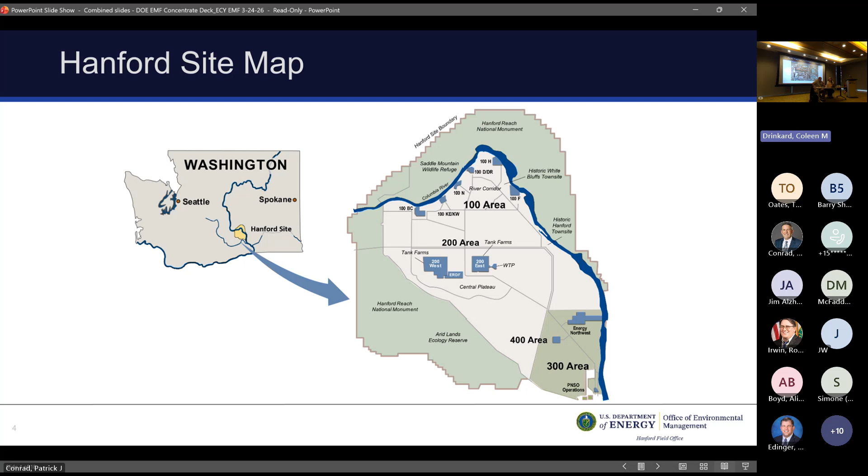Is it not switching over? Did it switch for you guys? Yeah. Oh, there it is. I'm sorry. My computer is slow. I'm on my phone, so my wireless is a little slow, and I don't want to make you guys feel weird by me looking behind me all the time. But I do want to make sure that the slide is up before I start to talk to it. So apologies for that. It's just a logistics thing.

I will try to be more patient. I also will acknowledge, I know I do talk fast, so later on when we get to the questions, I promise I'll answer your questions, but I do tend to talk kind of fast. It's just one of my little peculiarities.

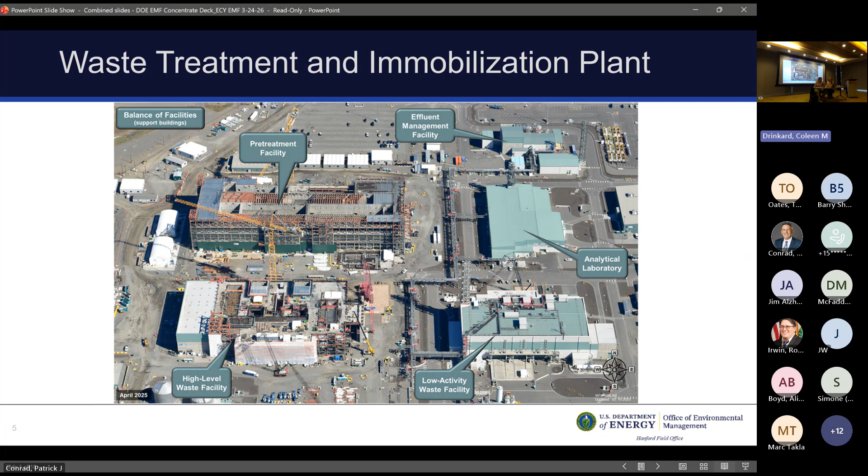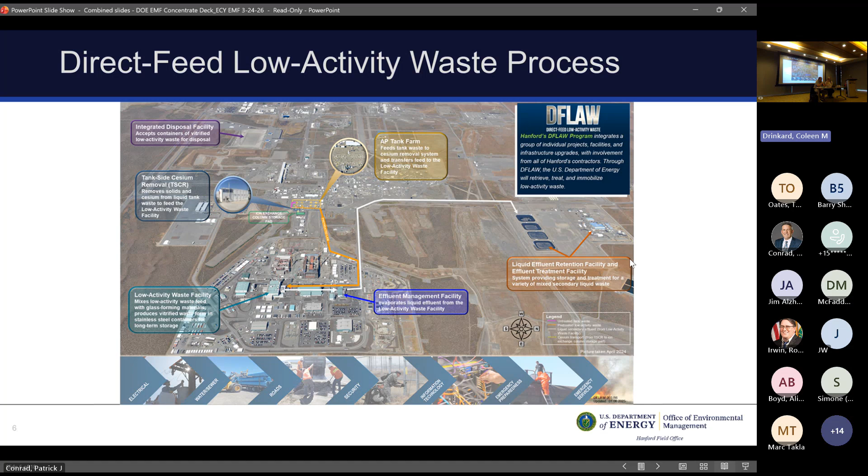And then our mission support contractor, HMIS, provides all of the infrastructure that's along the bottom. So it's just to show the integrated effort that goes on as we're making glass and performing this part of the tank waste mission. But it also shows how the materials are transferred from tank farms to LAW, from LAW for secondary waste, and then the actual containers that go to the integrated disposal facility. So just trying to give you that context of how the facility operates. So we'll go to the next slide.

Now we're going to talk about the overview of what we're proposing here. The effluent management facility is where that white line, after it leaves the low activity waste facility, goes. It has an evaporator in it. That's where we take those liquids, boil off the water, and send that condensate to the liquid effluent retention facility. And then the stuff that stays at the bottom of the evaporator, we call that the bottoms or the concentrate. That's the material that, and we will still have this function, by the way.

Our original design said we would typically feed that back into the melter, instead of feeding more AP-106 waste, more tank farm pre-treated LAW. I apologize, I know that's just inside baseball, as it were. But that material, we would feed that back into the melter. What we found is that material, the radiological contents are quite a bit lower than we expected, and it's much more benign than we expected. We will still be able to feed it to the melter if we have materials that come through that have some anomaly, and we will continue to sample it that way.

But we're proposing an alternative approach: we take that material, sample it, put it in a tanker truck and send it down for grouting, and then outside the state of Washington for disposal. Instead of sending that material into the melter, it allows us to increase the amount of the pre-treated tank waste we get from tank farms. So the intent is accelerating our mission, because we'll get about a 10% to 20% increase in the feed to LAW coming from tank farms, because this material would then go to grout. And if we have a sample problem or it's elevated, then we can send it into the melter just like we do now.

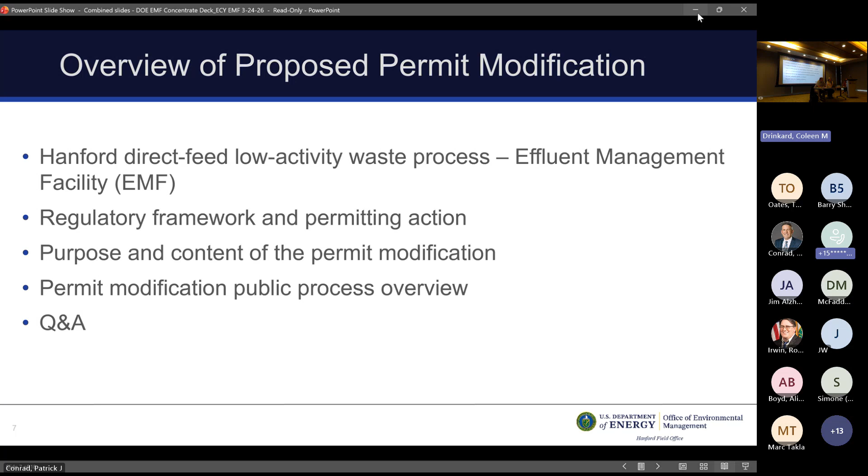Okay, so the first bullet we've already talked a little bit about, which is the multiple facilities that are involved. Yeah, thanks, Colleen, for asking that. The secondary waste is covered in the second bullet. And as we talked about, it goes to an evaporator, the steam that's then turned to condensate is sent down to our liquid effluent retention facility and the effluent treatment facility. And then the heavier elements that are at the bottom of the evaporator are then put in a separate vessel that then we can either feed back to the melter, or we can put it in a truck and then send it out to be grouted and then disposed of outside of the state of Washington.

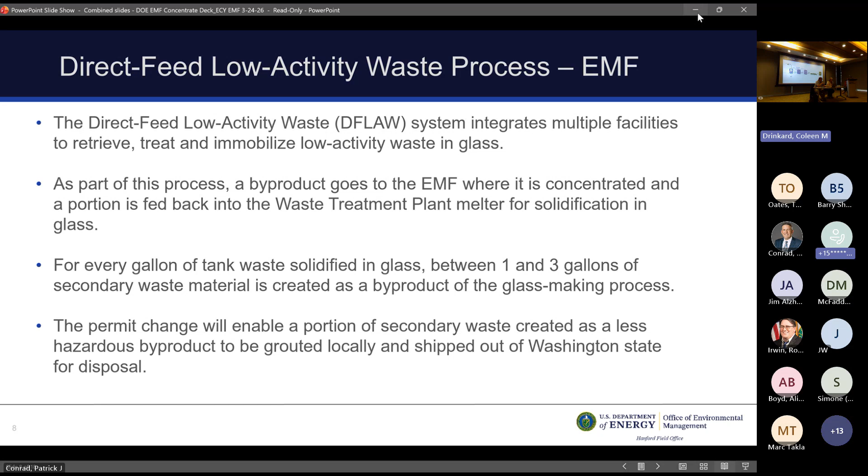So the last bullet is that EMF bottoms or concentrate. So I'm using both terms because they've been used interchangeably from a layperson standpoint. So if we can go to the next slide, I think that'll show us our graphic. Oh, I'm sorry, I need to talk about benefits.

And we talked a little bit about this, the reason we do want to free up double shell tank space is because right now we're 97% full of our double shell tanks. We have been making glass, so we just finished a 2-week run on the melter, and so we are making glass and filling containers, and that's great.

But the faster we do that, the more double shell tank space we make, we allow ourselves the opportunity to accelerate our retrievals, which today we're doing 2 retrievals, and I know that's not part of today, but that's why we want to maximize that double shell tank space so that we can continue our single shell tank retrievals and continue our mission. And at the end of the day, finish our mission. So that is the single biggest benefit.

It does not take away the ability to still feed the melter if, like I said earlier, sample results or something changes, we may get to the point where we're feeding the melter and the secondary constituents change, and that could lead us to feeding it back to the melter, and that's fine. But for those opportunities when we do, it'll be at least a 10% increase in our throughput from tank farms, could be as high as 20%.

And then just meeting our legal commitments, right? The better we can accelerate our retrievals and our other activities in tank farms, it puts us all in a better place. And then the final one here is really operational flexibility, which is having the options to use the melter and refeed into the melter when that makes sense, or go and grout it, if that's what the sample results tell us today. That's what makes sense today.

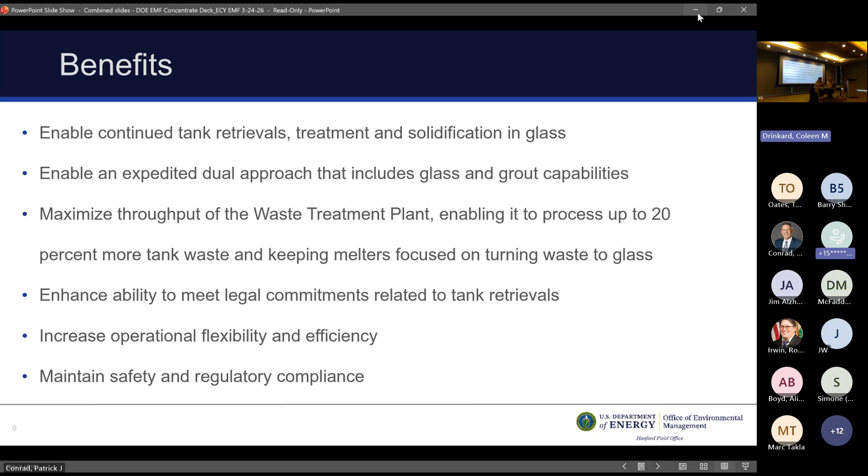And it doesn't change our safety posture. And once we've gotten through the process, then our permit will describe everything we're doing with any necessary changes. And Suzanne's going to go in a little bit more detail on that here in a few minutes. All right, now we're going to do what I think is the funnest slide, and that is this graphic. And so hopefully I will do it justice.

Off the top of the melter, as I mentioned before, any water that's in the waste flashes to steam. Any of the volatiles or any of the other things that go up with the steam go up through the off-gas system, and it has multiple trains.

Each of those items in that train have cooling, secondary cooling, and that's to protect it from the high temperature of the glass and the off-gas that comes off of that glass. Once it goes through all of that, it goes up through the stack, which is being monitored. We went through our extensive environmental performance demonstration test. It continues to operate exactly as designed and consistent with the testing that we did back in July, August. Seems like years ago, but it was only last July and August.

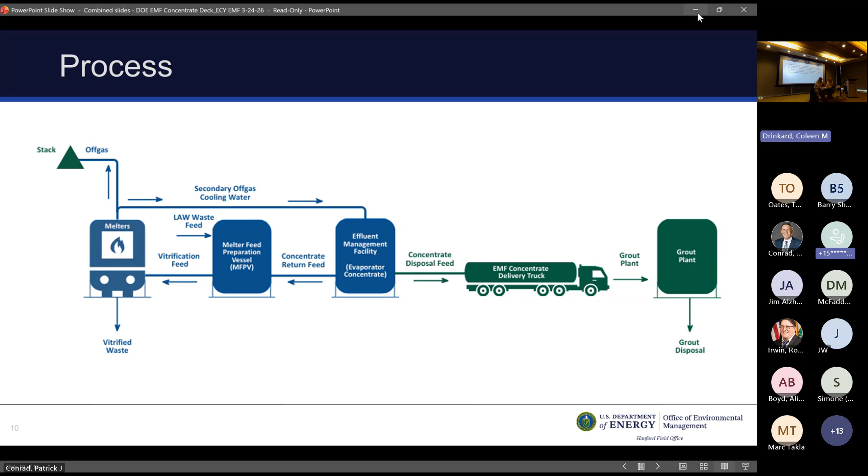So this graphic shows all of the things in graphical form that we talked about here a little earlier, and hopefully it's very clear. So that's a summary of the overall process. If we can go to the next slide. And so basically what we're doing is we did a class 2 permit modification that describes all of these changes. And so like I said earlier, the second bullet, Suzanne's going to talk in a little bit more detail, and we can go to the next slide.

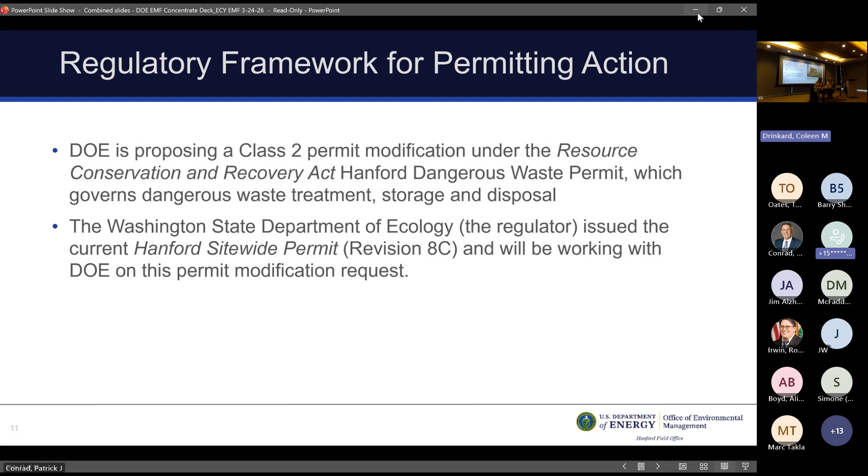We had to use it during cold commissioning because we had materials that we were putting in the system to test it that were simulants. Those simulants we had to put in tanker trucks because it makes sense to run them through the effluent treatment facility. So we have used it before, not for this function, but we have used it, and now the permit will contain the controls to manage that spill containment as well as the overall system.

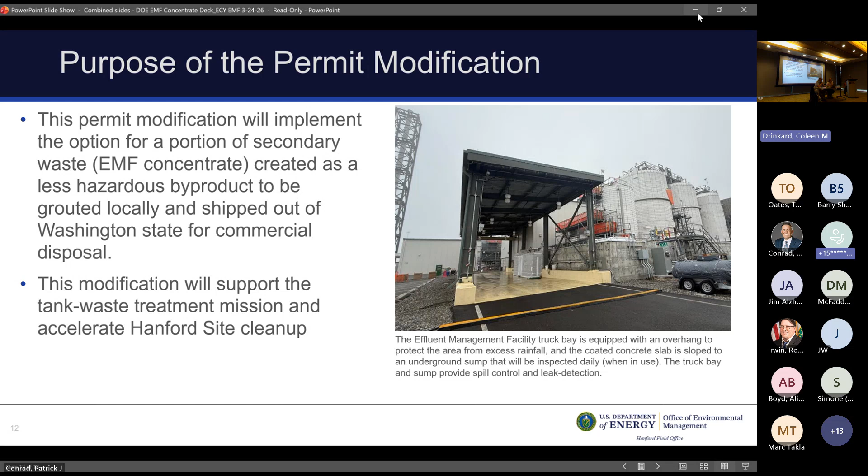And as I stated, the second bullet, the whole purpose of this is to accelerate our vitrification of tank waste, pre-treated raw tank waste, to accelerate the overall Hanford site cleanup. All right, next slide. And here's where I hand off to Suzanne, and she will carry us through. Okay, we can go on to the next slide.

All right, so there's several permits and licenses that cover the waste treatment plant. The Department of Health has radiological licenses, and Department of Ecology has air permitting as well. But the permit that we're talking about here is the dangerous waste permit that manages how the facility manages and treats the dangerous waste, the chemical waste that also happens to have radionuclides in them. So how did we get to here? Well, and Matt talked about it a little bit.

Originally, when we were first looking at all the different waste streams coming off of the plant and looking at the modeling and looking at the risk assessments, it was thought that what would be in the first part of the wash of the off-gas and the scrubber waters of the off-gas would have quite a bit of radionuclides in it and quite a bit of other things that would drive the risk. And so things that are mobile in the environment and that are long-lived.

And so from those risk assessments, we found that the best thing to do would be to recycle that waste past the melter over and over again so that you got more and more incorporation of those constituents that were risky into the glass. So what's different now? So that option still exists in the permit and it's still a viable option. But there are a couple of things that Matt mentioned.

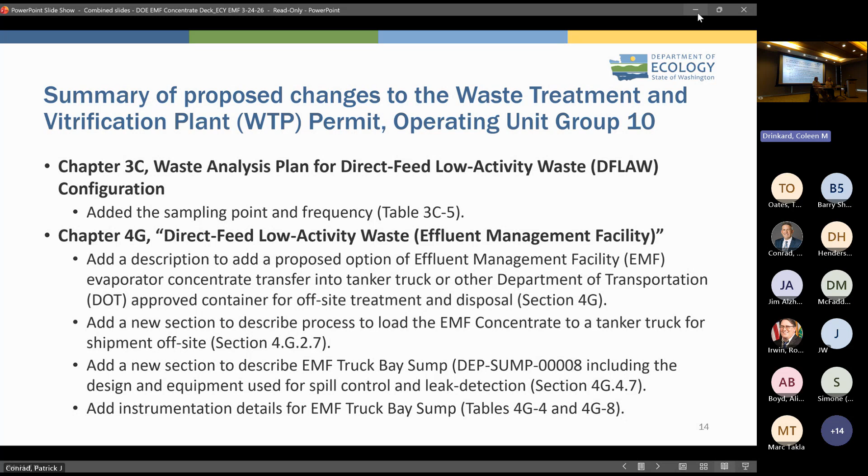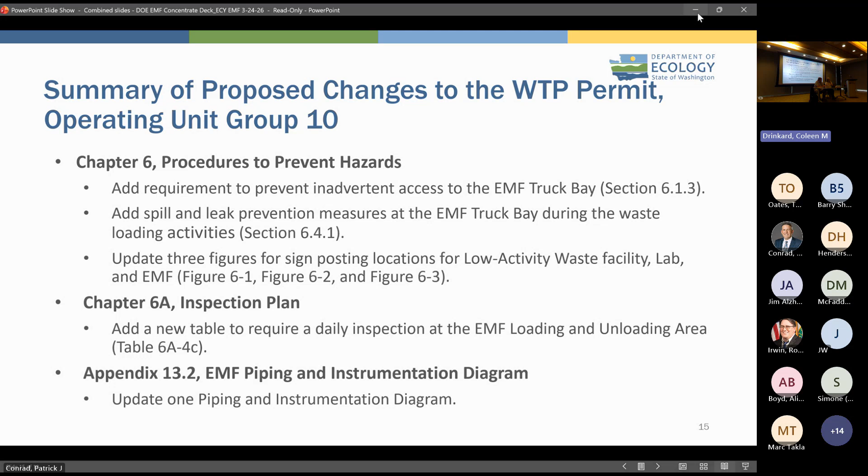And then in addition, some of the drawings were added. One drawing was updated. It's a piping and instrumentation drawing, so it's a diagram that shows where the piping goes and what piping goes where. And so that needed to be updated. Those are the chapters of the permit that were affected. I think I counted 6 out of the 9 or 10 chapters had small impacts to different tables and different diagrams. And those are all shown in the permit modification when you go look at it on the web. And then in addition, the Department of Ecology worked with the Department of Energy to develop some permit conditions that would now address this new approach to things.

And so there was a permit condition that was added to talk about when it's appropriate to recycle and when it's appropriate to have the EMF bottoms go off for off-site grouting and off-site disposal. There was also then a series of permit conditions that looked at some controls around that. So the first thing is there's a permit condition that says that the concentrates will go for off-site disposal, and that's needed because it can't go to the integrated disposal facility landfill.

There's also measures to prevent an orphaned waste. So what's an orphaned waste? Well, if the grout can't be disposed of here, then we don't want to build up a large sum of grout and then it not be able to go to the landfill where it was supposed to go. And so when might that happen? This is sort of Ecology putting its worries out there and just trying to prevent any future concerns.

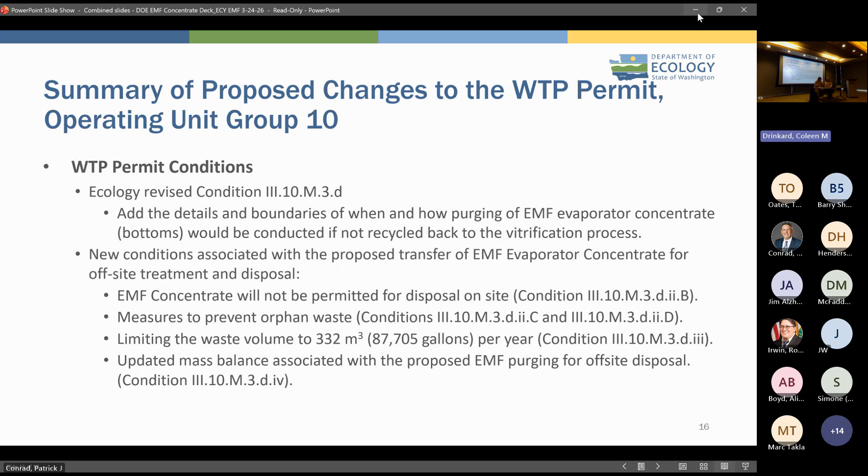And so since you're changing the process flow, and this is not going back into the melters, you're potentially changing the mass balance. And so we've asked Department of Energy to redo the mass balance, and it may very well show that there's not really much change at all, but we just thought that the mass balance needed to be updated. And that's the end of the description of the details of the permit and what changed in the permit.